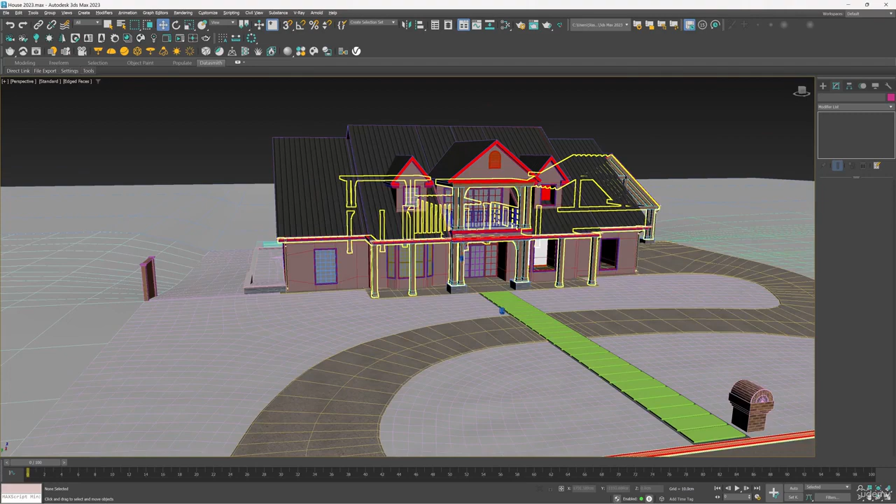Let's look at the structure of the house scene. For convenient work, I placed all the elements on layers. On the top, find the Toggle Layer Explorer. Now we can hide and unhide the categories of objects we need, for example doors, interior furniture, interior light, as well as other categories of objects.

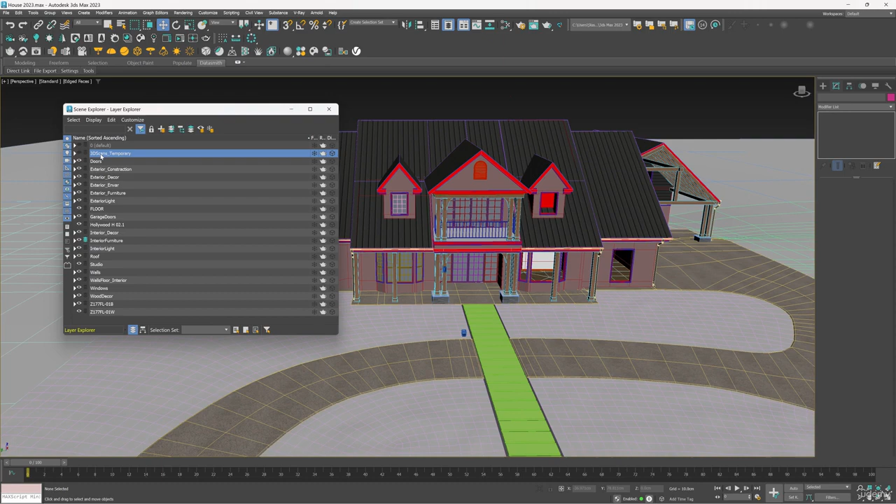3D Scans Temporary and Zero Default layers are working layers that contain objects not intended for export to Unreal Engine. The 3D Scans Temporary layer contains scans of a real building which I used to build the 3D model of the house. On Layer Default are auxiliary objects. Hide the 3D Scans Temporary and Default layers.

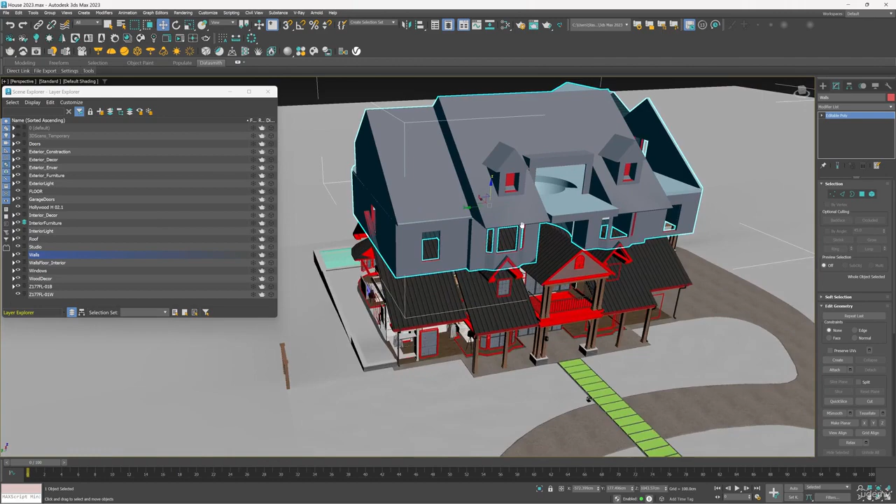Select the walls of the house. As you can see, this is a single mesh. I merge all the walls into a single mesh for better optimization. By the way, in the form of a single mesh, your client can transfer the 3D model to you when exporting from SketchUp, Revit or Archicad.

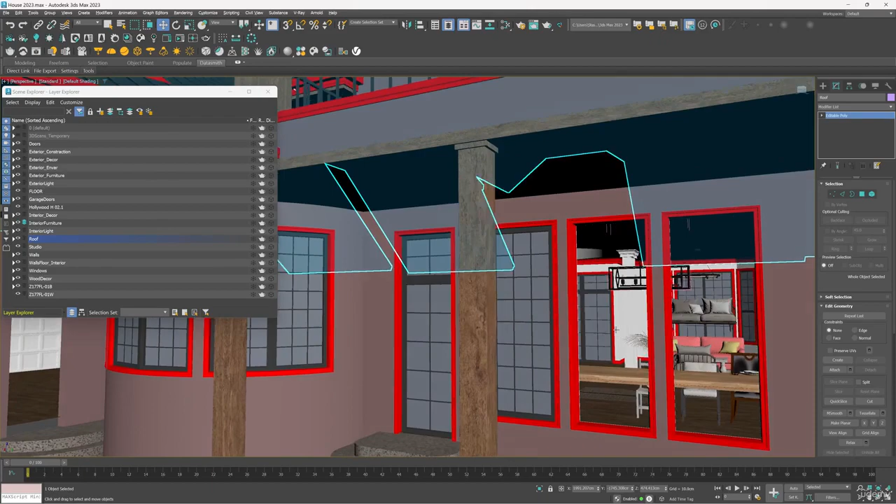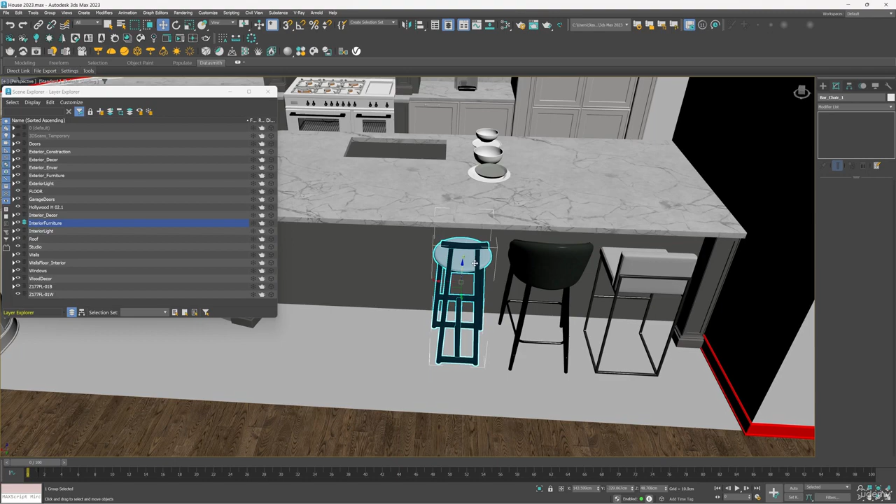Let's go inside the house. All decor elements, lamps, furniture, sinks are placed here in one copy. I will copy them in Unreal Engine. Some furniture has 3 options, which I'll use to create interactive object replacements.

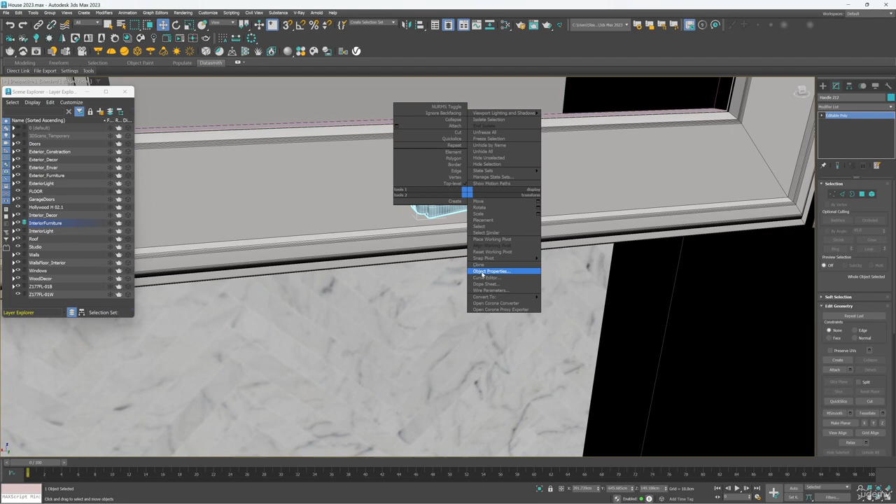The stair railing also has a lot of the same elements. It is better to copy them in Unreal Engine. Handles on kitchen drawers - just look how many polygons they have. It's easy to understand that these handles will create an extra load on the system if we put it on each door in 3ds Max and export them to Unreal Engine.

Hide the wall and roof layers. Move onto the furniture in the master bathroom. The furniture has a mirror arrangement on the left and right. This allows us to leave only the left side and mirror the right side in Unreal Engine.

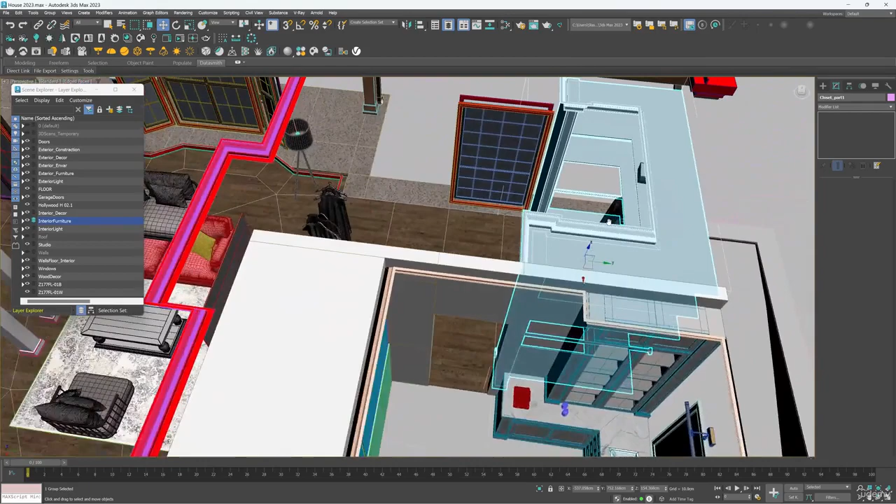Also, I will do this in the closet - just mirror the left side of the furniture. The furniture block in the master bathroom and closet is merged into one mesh. I will make copies of the fence sections and adjacent houses in Unreal Engine.

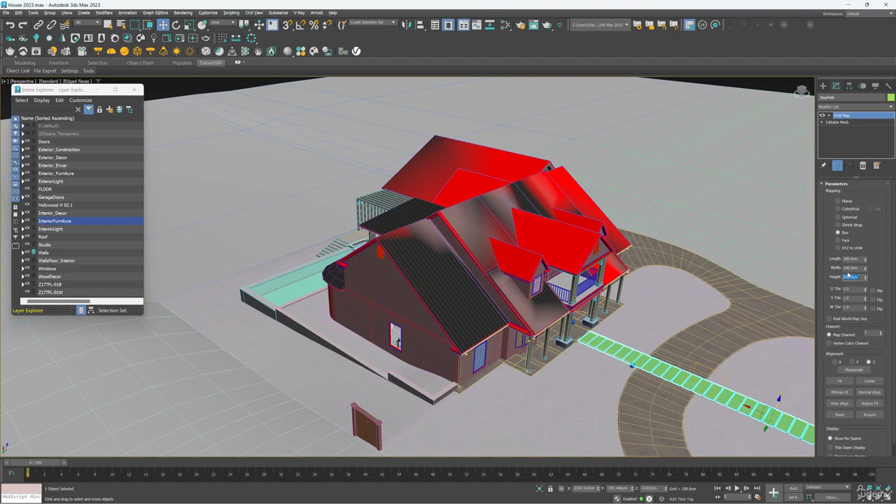Almost all elements of the scene are textured with the UVW map modifier in box mode. Value of all sides is 100 or 200 centimeters. This is a quick method of texture mapping simple geometry objects, such as roof, windows, walls or columns. The UVW map modifier is also applied to all painted objects or metal objects. This is necessary for the roughness map to display correctly.

Unreal Engine supports texture resolution up to 8K. According to official guidelines, it's better to use textures with power of 2 sizes 1:1, for example 1024, 2048, 4096. The optimal texture resolution from the side of quality and optimization is from 2048 to 4096.

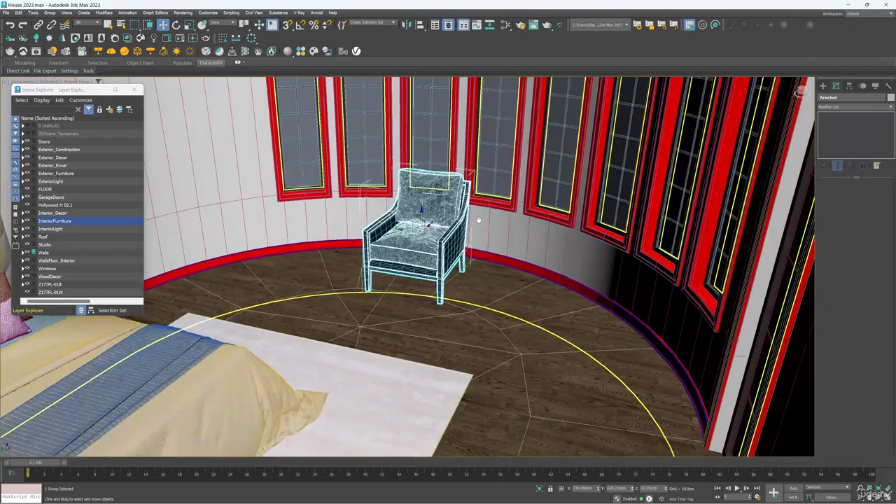Now let's move on to cleaning the scene of unnecessary geometry. I'm going to remove the extra detail elements. Let's take this chair - group, open. It has imitation stitching on it, which is 77,000 polygons, a lot.

I'm going to remove it. After, don't forget to close the group. Group, close. Move on to the chandelier above the dining table.

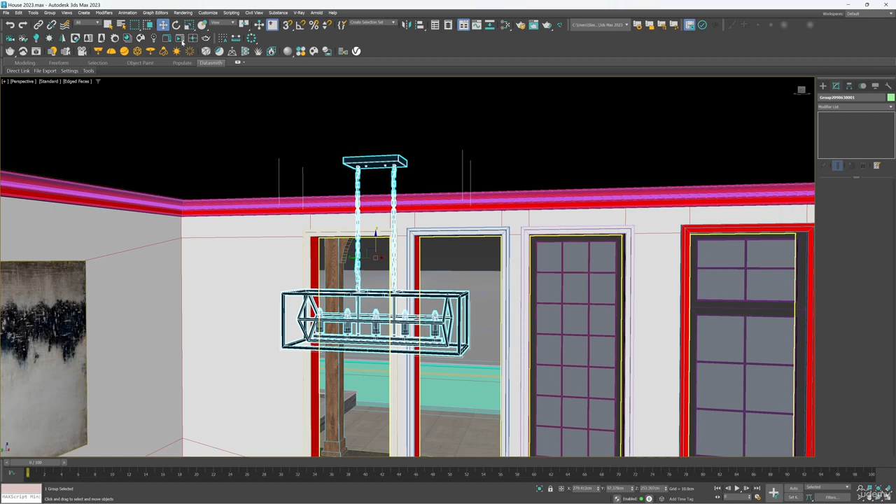The mesh looks great. I will be applying the emissive material to the glass surface of the lamps, so I don't need their internal parts. Open the group, select the lamps. This is a single mesh.

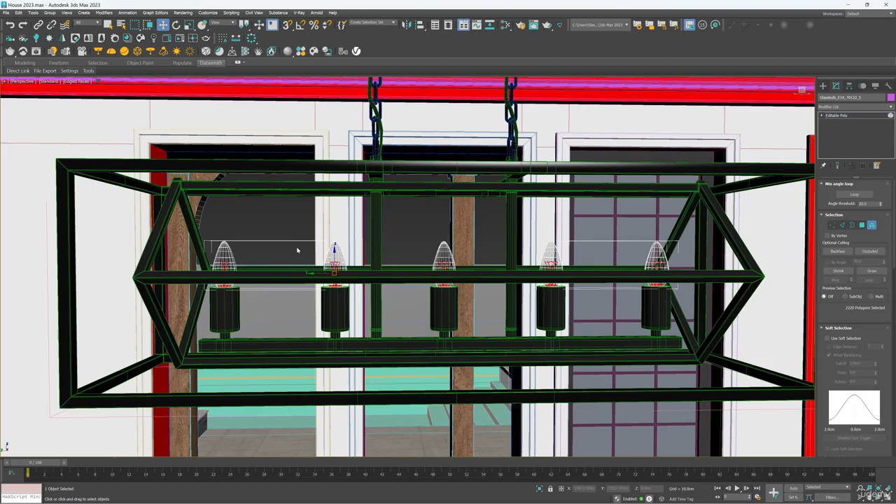Go to the panel on the right side and select Element in the Selection tab. Now you can select unnecessary geometry and delete it. I will select all the lamps and with the Alt key pressed deselect the glass domes. Press the Delete key and close the group.

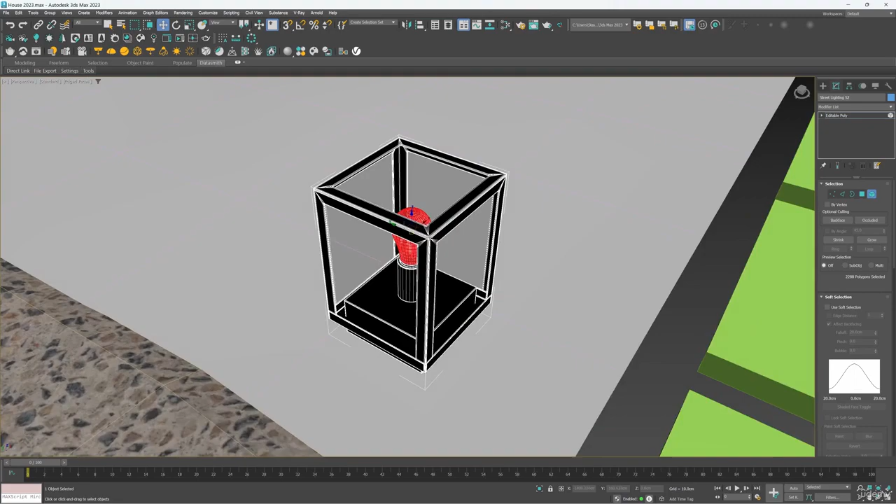Then I will do the same with the chandelier in the kitchen. Do the same with the street lamps at the entrance. Now the chandelier on the terrace.

Before exporting, make sure that the objects in the scene that you will copy or move in Unreal Engine have a central pivot relative to themselves. If this is not the case, fix it, otherwise it may be difficult to work with them in Unreal Engine. Select an object, such as this table - its coordinate system is offset.

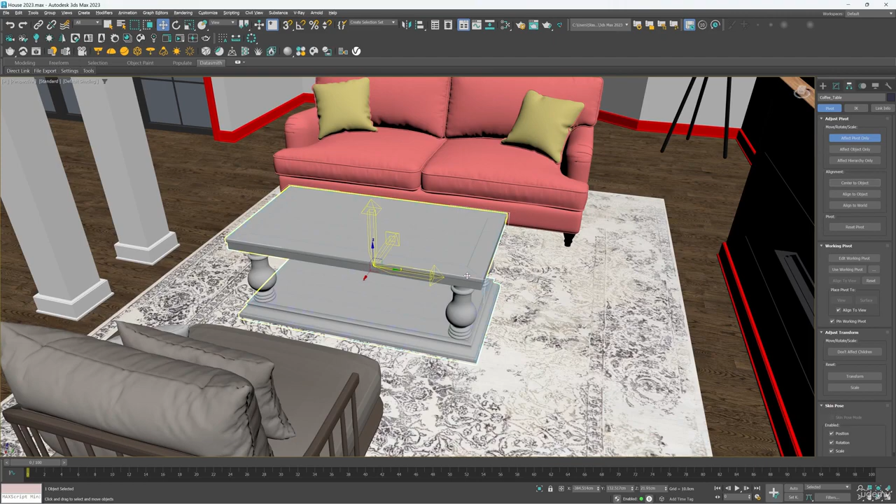Go to the panel on the right, to the Hierarchy tab. Affect Pivot Only, Center to Object. Ready - now the pivot is in the center of the object.

Don't forget to give names to all objects in the scene, like this: walls, roof, windows. This will help you navigate easily and makes your job much easier. The scene is ready for export. Save the file.